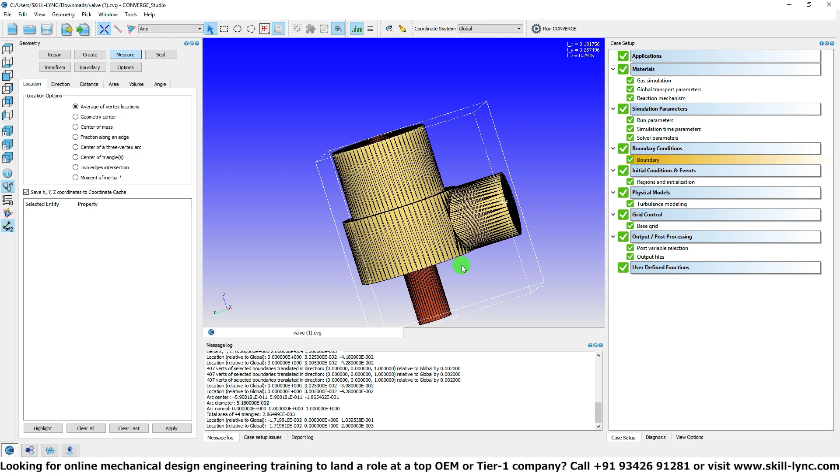So that being said, we are going to jump to the second phase of this problem where we are going to be running a transient simulation. So one of the powers of using computational fluid dynamics is you can basically look at the valve dynamics as the inlet pressure is changing, because that is one of the characteristics of a proportional valve, because the inlet pressure is going to change as a function of time, and engineers would be interested in looking at how the valve actually opens for a given value of pressure.

Now, in order to do this perfectly, you would have to resolve all of your pressure waves so that you get your valve dynamics very accurately. And unfortunately, if we do that, then our simulation time is going to be extremely huge. However, I will actually show you how engineers in companies set up their simulation if they are interested in capturing detailed valve dynamics.

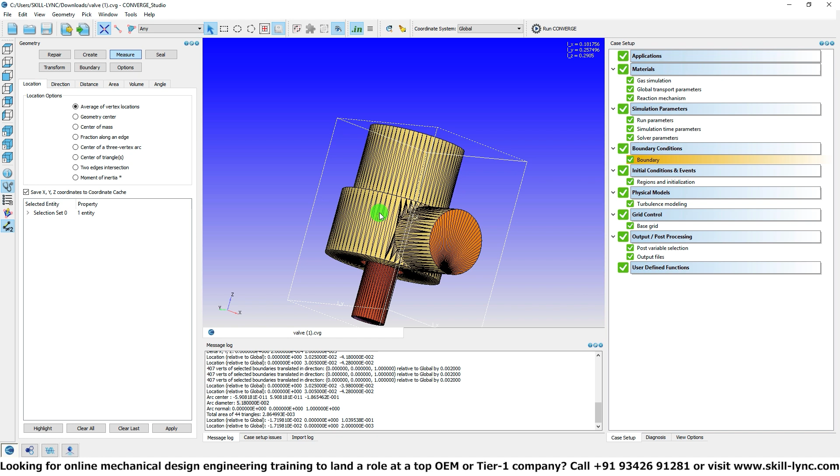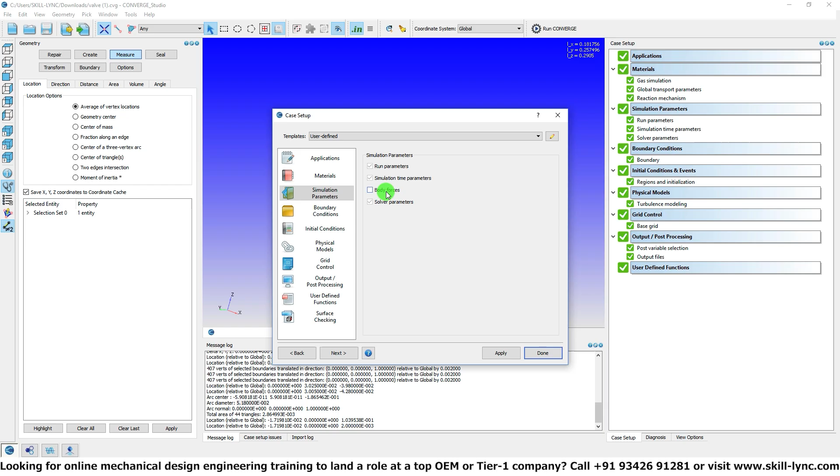So to get started, the first thing we need to do is we need to go to run parameters, and we need to make sure that this is no longer a steady solver. We are going to use transient solver because we are going to be varying inputs as a function of time. Let's click on OK and then yes. So once we have done that, I'm going to click on simulation parameters and I'm going to enable body force, and then click on body force and then go to Z direction and enable gravity by putting in a value of -9.81.

Okay, so the primary change comes to our inlet boundaries. So if you go to inlet boundary, you can see that currently we have a single pressure which is 30 bar. I'm going to click on use file. And what I'm going to do is I'm going to provide a temporal profile, meaning I'm going to vary the pressure as a function of time. So what we have done is we have already created an Excel sheet that basically contains time and the pressure that's going to act on the inflow.

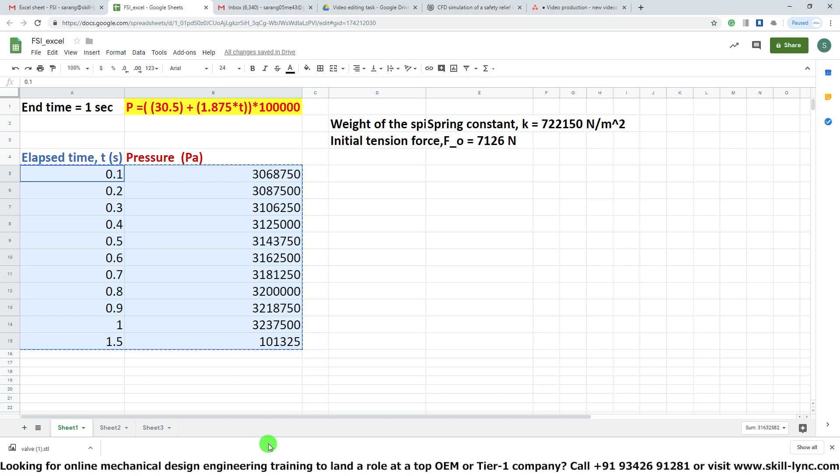So I'm going to copy this data, and this Excel file is shared with you, so you should also be able to do it. I'm going to come here, right click, and I'm going to paste rows. So when you do this, I will have my pressure as a function of time. Now remember, pressure should be in pascals. So if you are using pressures in bar, you need to multiply that by 1E5, or 1 followed by 5 zeros. I'm just going to call this as inlet pressure.in. And you can also click on this graph button to understand how the pressure variation is going to be.

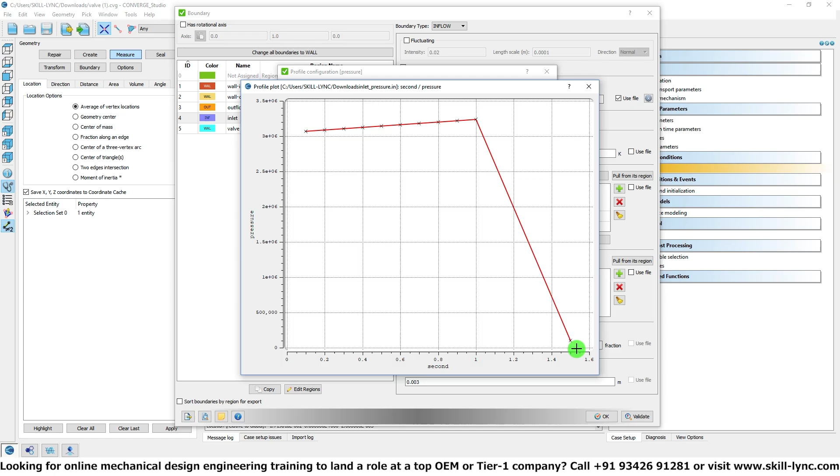You can see that initially the pressure is very high, and this is going to push open the valve at least a little bit. And once it reaches a maximum value, the pressure is quickly going to drop. So this means our valve is also going to drop to its initial state as it experiences gradually lowering pressures. So let's close this guy and accept the pressure and click on OK.

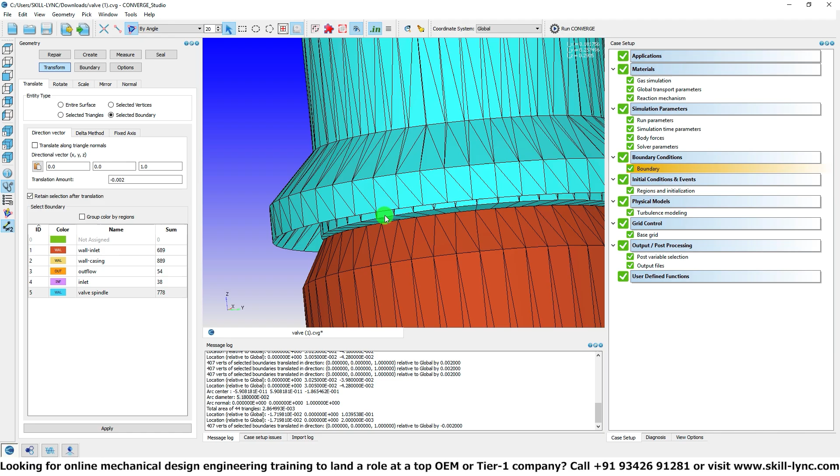Now in terms of geometry, what you want to do is you want to basically bring the valve down to its original lift. So in this case, let's go to transform, translate, selected boundary, and we are going to move it in the opposite direction by 2 mm. So that means the current lift is going to be 1 millimeter. So this should be the starting point for this particular study. The next thing that I want to do is click on physical models, and I want to enable the fluid structure interaction model. Click on apply and click done.

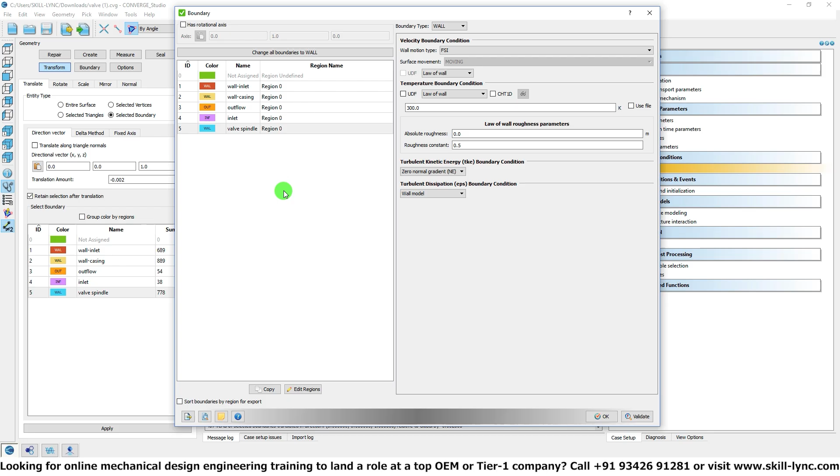Then go to boundary, and I'm going to click on valve spindle, and I'm going to say that this is going to be a wall boundary, but it's going to be an FSI object. So this way we know that this boundary is going to be moved based upon fluid structure interaction. That is, at each and every time step, Converge is going to calculate the pressure forces that are acting on the valve spindle. It's going to integrate the pressure to calculate Fx, Fy and Fz. Then we basically have an equations of motion solver that moves the spindle accordingly. So let's click on OK.

And then we are going to go to the physical models where we select fluid structure interaction. The first thing that you need to do is you need to create an FSI object. So once you create an FSI object, you add a boundary to it. So in this particular case, it's going to be our valve spindle. Then we come to parameters.

Now in this particular case, we would like the FSI calculation to begin right away. So the start time is minus 9E5 or minus 9E6. Don't change that, because this way we know for sure that FSI is going to begin right from the first time step. So then we have to set up the center of mass.

In this particular case, we are going to compute the center of mass using the geometric center. And we are going to specify the mass value, which I believe in this particular case is 3.1 kg. Once you have done that, you can set up initial velocity or initial rotation along with the initial rotation axis, but none of those inputs are required for our problem. So you can directly go to forces and moments.

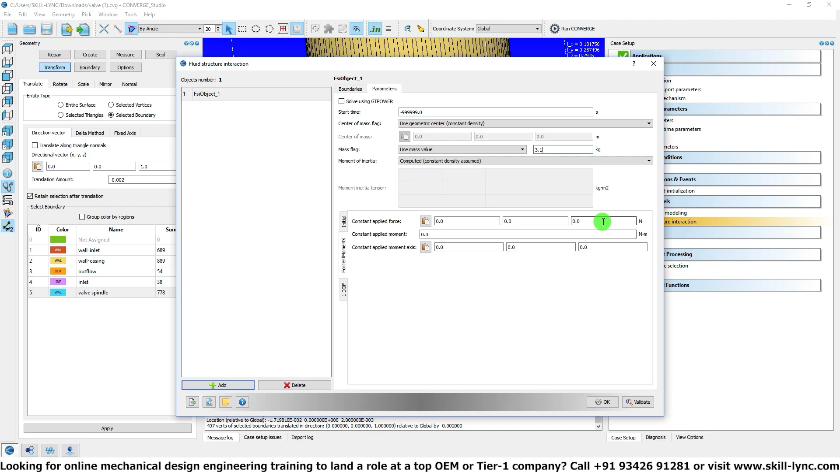So here there is something called a constant applied force. Now we would need to apply a constant force in the negative z direction. So that is really important. Remember, the spindle has a particular preloading, right, which is about 7,126 newtons. That needs to act in the negative z direction. So make sure that you put in minus 7126 here.

And then there is another option called 1 DOF, which is 1 degree of freedom. So we want our spindle to move along the z axis. So I'm going to say that it is constrained to move only along the z direction. So there is no rotation for sure, and translation along x and y direction are also prohibited, which means out of the 6 available degrees of freedom, 5 are constrained. So you have only 1 DOF, and that is a translating degree of freedom along the z axis. So the direction is going to be 1.

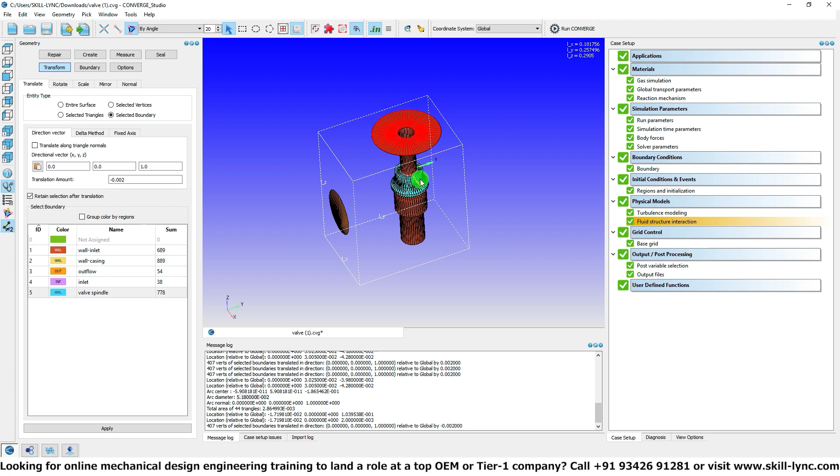Now there is something called minimum displacement and maximum displacement, correct? So we don't want to change the value of minimum displacement, but we do want to change the value of maximum displacement. So what does that mean? To demonstrate that, I'm just going to click on OK here, and come here. So as the pressure forces act on the spindle, it's going to push open the valve, correct? This valve spindle is going to move up, and in that process, this particular layer of triangles is going to get compressed.

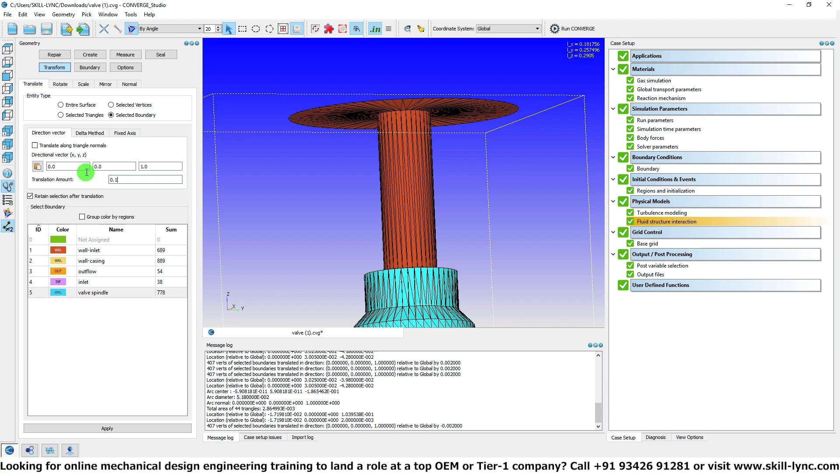Now if the valve lift is too much, if it is greater than this particular length, then it can actually cause problems. So let me demonstrate that by translating the spindle along the z-axis by 10 centimeters, which is 0.1 meters. If I click on apply and run diagnosis, you can see that that's basically the limit. If I do undo here and push open the valve by 12 centimeters and click on apply, you can see that it has clearly intersected with the geometry. And if you hit find, you will see that there are problems.

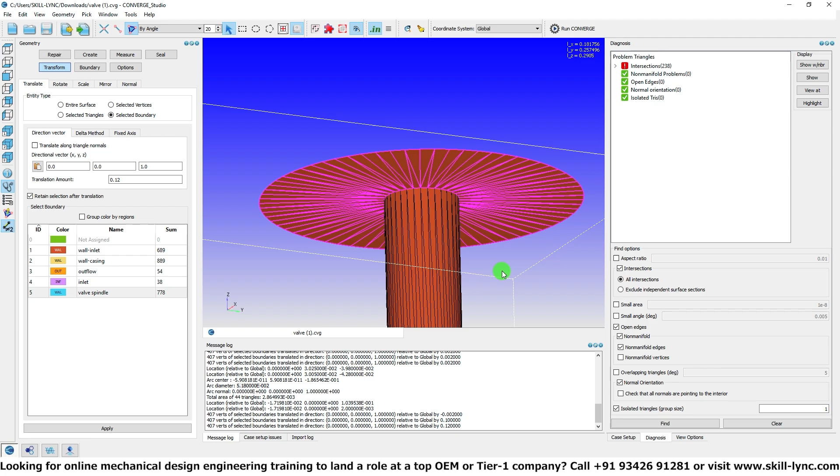So we need to make sure that the spindle does not move more than 10 centimeters. Let me click on find again, no errors. So go to case setup, FSI, parameters, 1 DOF, max displacement. Remember this is in meters, so I'm going to put in 0.1 meters, which is 10 centimeters. And let's click on OK. We are not going to hit that limit, but if we do, the displacement of the spindle would be stopped so that the case does not crash. And we will be able to capture all of this in post-processing.

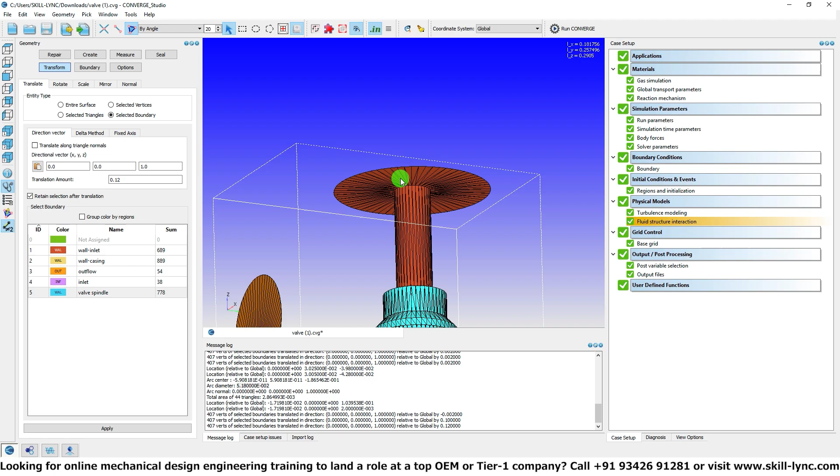Now, one important thing that we need to change is our simulation parameters. If you go to boundary, inlet, you see that up to 1.5 seconds you're simulating the entire event. So you might want to run the simulation for maybe 1.6 seconds. The initial time step is 1e minus 9. The minimum time step is 1e minus 9 as well, and max time step is 1 second. Click on OK. And then we go to output files.

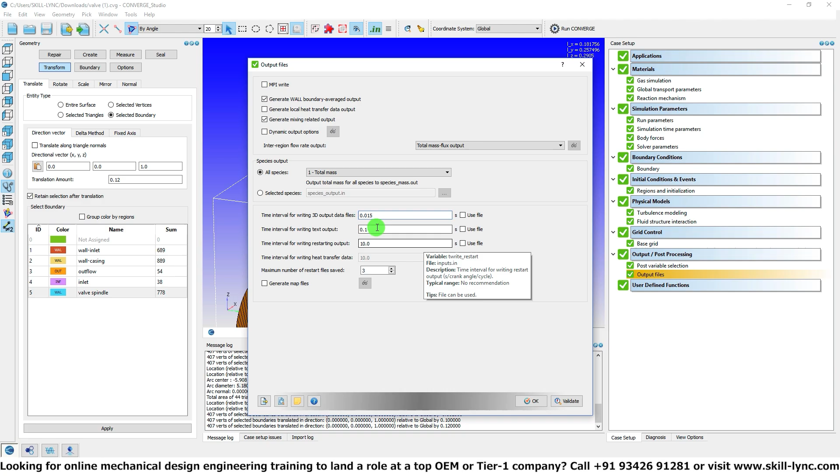We want to make sure that we are resolving this event. We are running the simulation for about 1.5 seconds, right? We would at least want to get like 100 pictures of this entire event. So I will say that 0.015 is my time interval for writing 3D output files. I hope that makes sense. And I want data to be written every 1e minus 9 seconds, so pretty much every time step we will have an output file. Restarting should be done a bit more carefully because the simulation might crash. So we will write restart files every 5 milliseconds, but keep only 3 restart files.

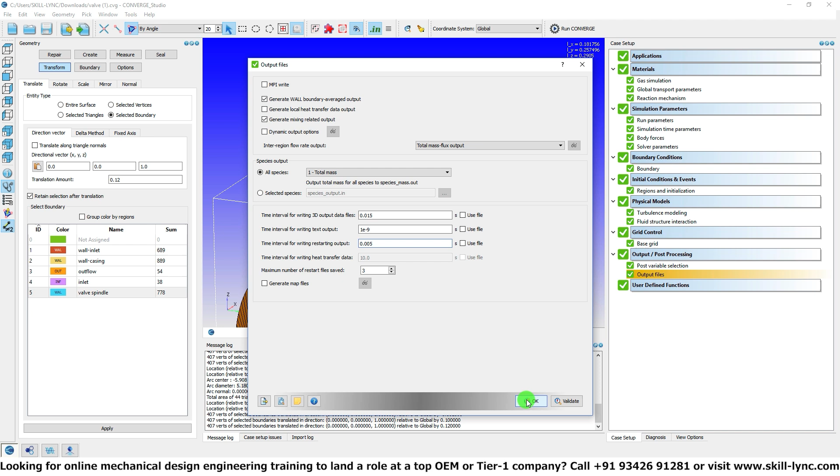So let's click on OK now, and that concludes our transient case setup. I'm going to export this case setup and run the simulation. Once I have the results, I'll come back again and discuss that.